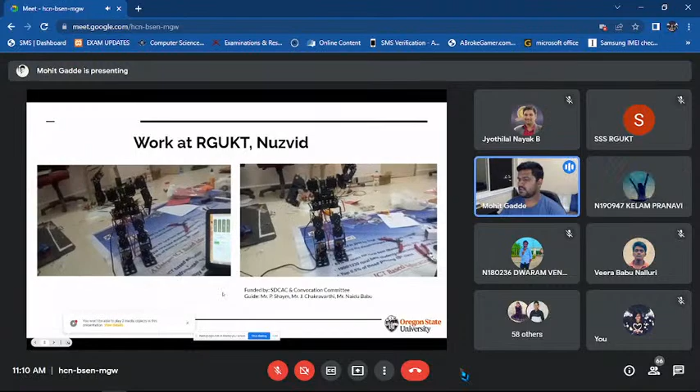I do not have the latest videos in which we were able to make the robot walk as well, and this was presented at RGUKT RK Valley in front of the chief minister back then.

After completing my third year, I joined Indian Institute of Science as a summer research intern. On the left, you can see a huge drone which would almost come till waist length, which I built during my internship there.

I am very proud to say that this drone was manufactured end to end, where I put in all my efforts. The whole structure and control systems were built by me. All I got was the batteries, motors, and the flight control board. Apart from that, everything was manufactured using carbon fiber.

Back when I was a mechanical engineer, I used to design robots and manufacture them using carbon fiber. This is one of the videos in which we showed testing of the same.

This particular drone has a thrust of 20 kgs, which is pretty huge. This was kind of unachievable back then, because we were intending to build this drone to carry organs. So it would be used as an end-to-end or last mile delivery system, where an organ for a transplant would be picked up from the airport and sent to the hospital, which would otherwise be tedious.

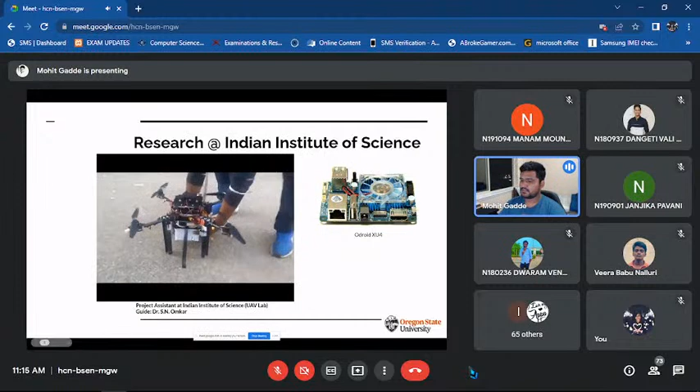We had a single board computer, the Odroid XU4, which uses a Samsung Exynos compute processor. The drone would take off manually controlled, then we shifted to guided mode, where the drone would try mimicking how humans walk on the road.

We are detecting the road and trying to stay in the center, which you can see with the mask. The drone autonomously traverses to a given GPS point and delivers the box. We were able to achieve this feat for about 1 kilometer, actually around 918 meters.

We could proudly say we got a drone autonomously flown from one end of the campus to the other end, autonomously delivering stuff. This was back in 2018. So this is how it traverses.

After working there for 6 months, I started working with Professor Debasish Ghose at his Guidance, Control and Decision Making Lab. This laboratory was initially working with guidance of missile systems and aircraft controls.

Later on, we planned on participating in the Mohammed Bin Zayed International Robotics Challenge, funded and organized by the current Crown Prince of Abu Dhabi. We had some interesting competitions, and this challenge involved using a team of drones to do various tasks.

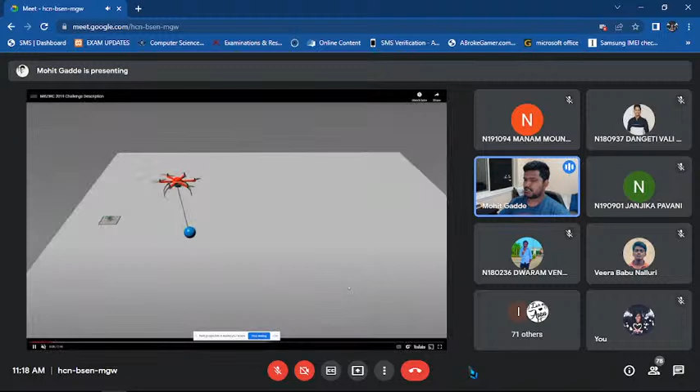We have what we call a rogue drone, which carries a ball and flies freely in open space. We have a team of 3 drones, though here they're showing just 1. These 3 drones go and detect where the rogue drone is, with no prior information, so we have to detect it using cameras.

Once we detect it, we grab the ball and neutralize it. This was the turning point, especially for me in terms of research, because we faced a lot of issues, and the problem statement wasn't constant throughout the competition.

In this video, we can see a blue ball being thrown into the box, which was the target then. Later on, the organizers started changing the rules, and we had to adapt to them accordingly. I'll walk you through this challenge.

The basic idea was to detect a drone carrying a rogue payload, grab it, and then neutralize the object. The other part was, if something is being planted, you had to eradicate it.

In our approach, we followed a similar architecture: we would search, try getting drones, do color segmentation thresholding, and create the region of search. I'll take you through it one by one.

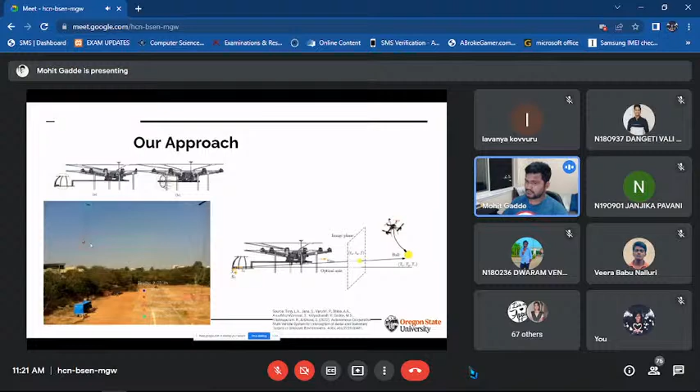When the filter was used to detect the ball or the target, whenever it wasn't detected as such, or we lost detection due to various conditions like lighting or wind gusts, or maybe software failure, this was one challenge in which we had to detect the ball and go through it.

And the second one was to pop balloons. Balloons were an artificial way of saying that the enemy has planted something in our territory and we have to neutralize it using drones. There were 6 to 7 balloons planted in the same arena, where one drone would fly carrying a ball, which we had to neutralize using one of our drones, and the other drone would neutralize the planted objects, which were the balloons in this case.

So we used a SAC-based controller. When we were testing these things, we found a lot of variation in the system parameters, and we had to adapt to a simple adaptive controller. Initially we were just going with a PID-based controller, and then we thought of using an adaptive controller since it was more robust to the gust or wind or whatever was being thrown towards the drone.

In our approach, what we did is we tried detecting the path of the drone. Here we used an RNN-based network, a recurrent neural network, to detect the drone and feed its point, and we used curve fitting methods to detect which path it was taking.

And then we had two of our drones which were aligned in a horizontal structure, where they would go and attack the target drone, and we grabbed the target. We were given 3 drones, of which 2 were put into neutralizing these targets, and 1 drone was used to neutralize all the balloons. It would take a grid search path and neutralize all the balloons.

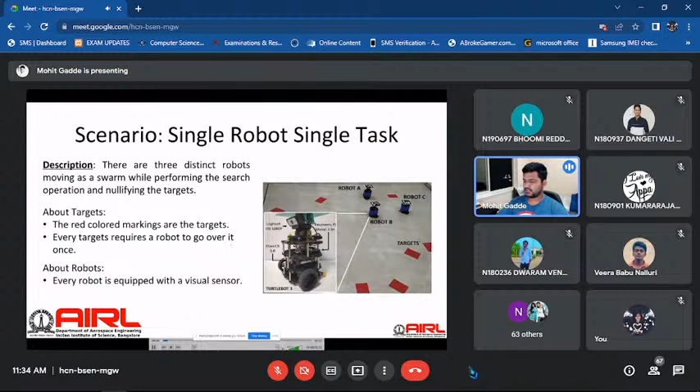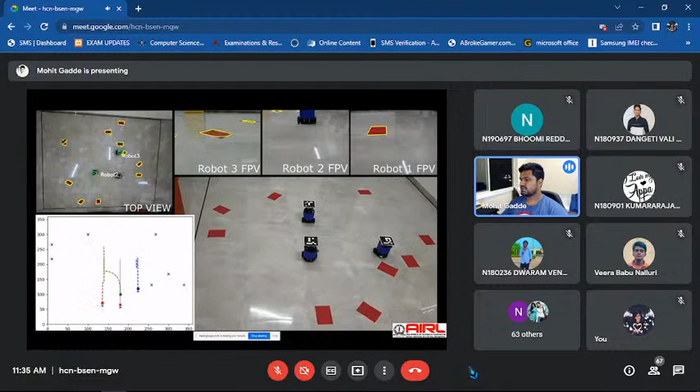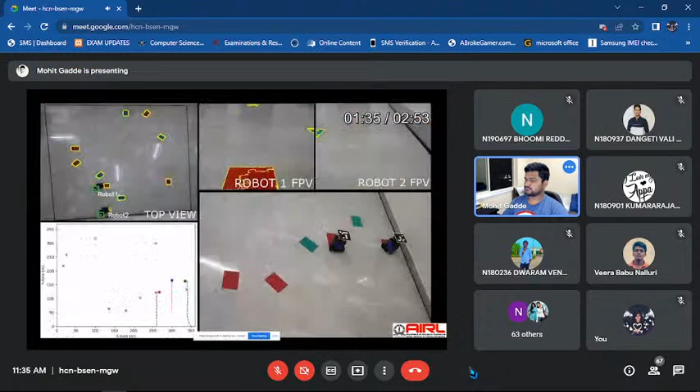So the platforms which we tested on were TurtleBots. Three robots would talk to each other using a regular Wi-Fi based network, and would update and track target neutralization. The red markers here are targets, and these robots would autonomously traverse through it in a team, trying to stay in formation without losing track. These robots would neutralize stuff. We can see markers here, used for our use case, where we would detect them as robot 1, 2, 3 to individually identify them. So yeah, this was basically on team robots.

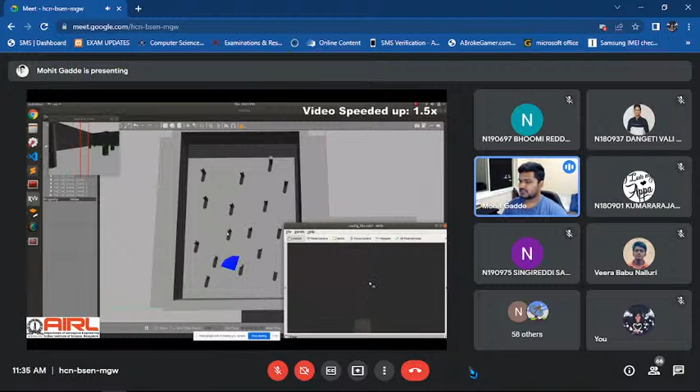Later on, before finishing work there, I worked on an algorithm used on small quadcopters, where they were able to fly at 5 meters per second, which is pretty fast for drones, using multi-sensor fusion techniques, and we demonstrated it in simulations. This project involved avoiding obstacles using just camera and LiDAR systems, and we were able to detect pretty much everything in clutter, controlling the drone and sending it to the given target.

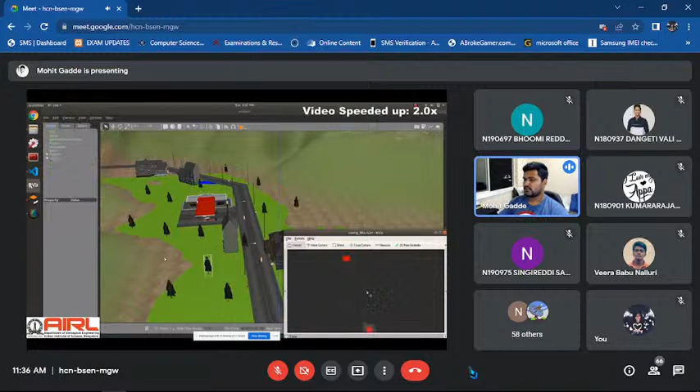This system was tested in an environment in a simulator called Gazebo, where we tried using realistic environments to solve the problem. We looked into realistic approaches using Microsoft AirSim, where this algorithm was tested on drones to see if it could traverse forests and similar terrain.

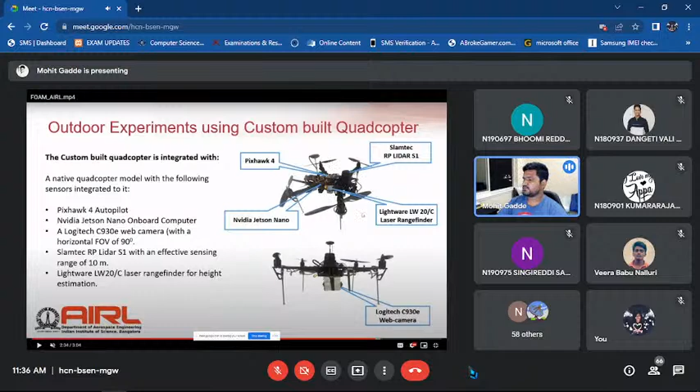So we tried testing it on hardware. We built a small drone and put a LiDAR on it—this is a small LiDAR system here—then we had a camera attached to it, basically to avoid this particular pool. This was done during the peak times when COVID hit us, and we couldn't really finish testing. We were just able to finish the basic testing of this particular system, and yeah, we got through the whole thing.

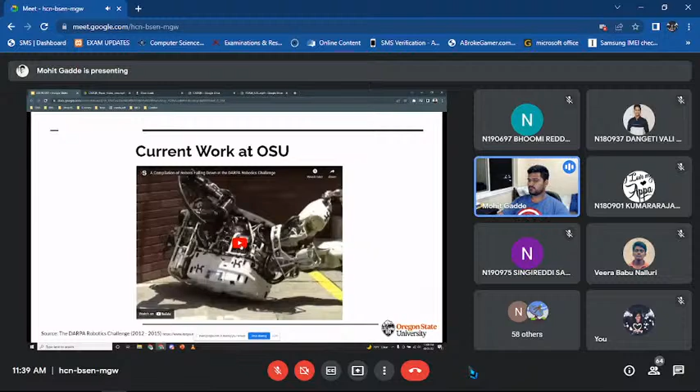I was pretty much done with mobile robots and aerial vehicles, because I wasn't feeling that enthusiastic or motivated towards solving any other problems. It wasn't that—it was just because these particular systems were more complex and could be evaluated against what humans usually do.

So these clips are from the 2012 to 2015 DARPA challenge. DARPA is a defense research agency for the United States of America, and they invited universities to build humanoid robots to do regular stuff which humans would do. This is what was the state of the art back then. There's been a lot of technological jumps since, but that was the era when humanoids actually grabbed people's attention, and researchers wanted to explore this field.

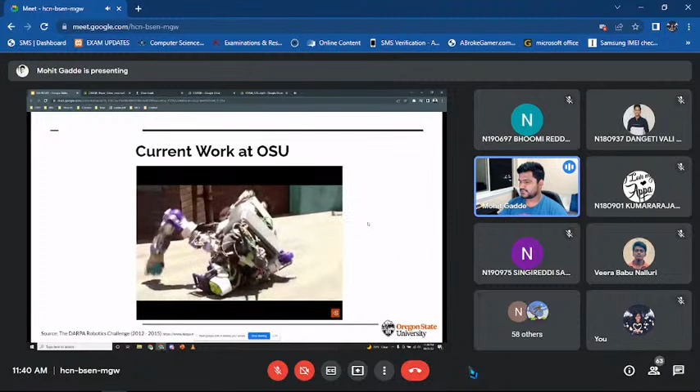So these systems use classical control methods like PID, model predictive controllers, sliding mode controllers, etc. Our lab doesn't work on these controllers, and we have our own framework which works on reinforcement learning.

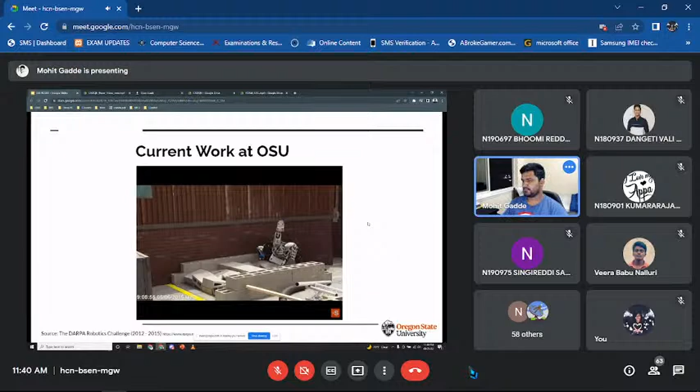Reinforcement learning is part of artificial intelligence, where we use reward-based functions to define states of the robot, and we penalize it based on what action it took. It's basically like training a child to do something—when a child does something wrong, you punish or scold it; when it does something good, you reward it. It's the same thing, but we use neural networks to do it.

Here at Dynamic Robotics Lab, we use our bipedal robot, Cassie. This is the Cassie robot, developed in-house at Oregon State University, I guess some 4 to 5 years ago, and development is ongoing.

These two projects were done before I joined the lab, and then we started working on reinforcement learning, and we have a couple of world records now.

So this is what we did, and there are other actions which we showed with the robot. A robot with the same neural network policy can do different types of gait motions like hopping, trotting, galloping, running, etc. It's the same network used to do that.

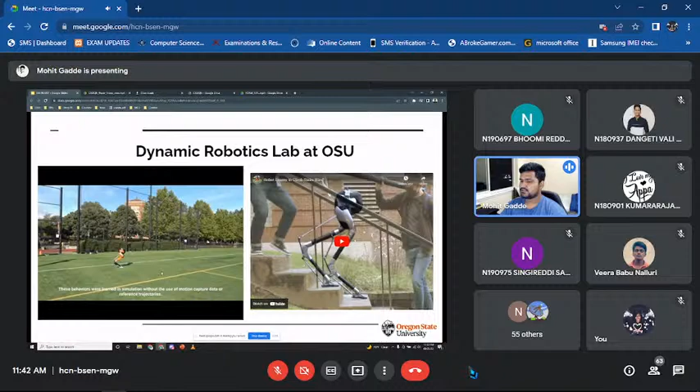The only thing we change is the phase input, and you can see different behaviors of the robot when it's in motion. Usually neural networks are not well suited to these changes, but we got them working.

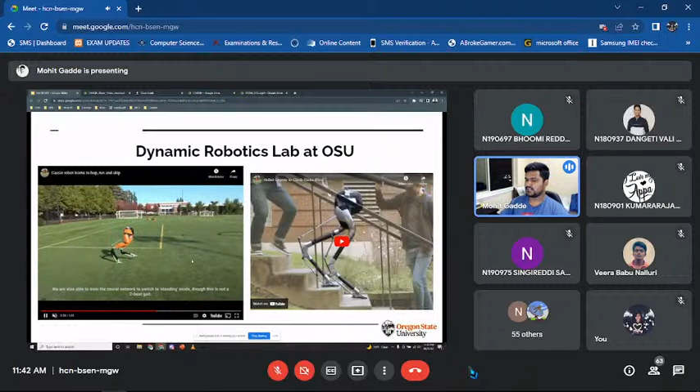This is one of the achievements done by the lab. Our recent work is traversing staircases blind—the robot has no perceptive interface at all. It doesn't have a camera, it doesn't have a LiDAR. It tries walking on the steps.

We used reinforcement learning techniques to help it understand how it went. We use a simulator called MuJoCo, where we have steps designed, and we train the robot to understand it. It's not only trained for a certain height of steps—the policy is trained using something called dynamics randomization, where the system features, environment, everything is randomized.

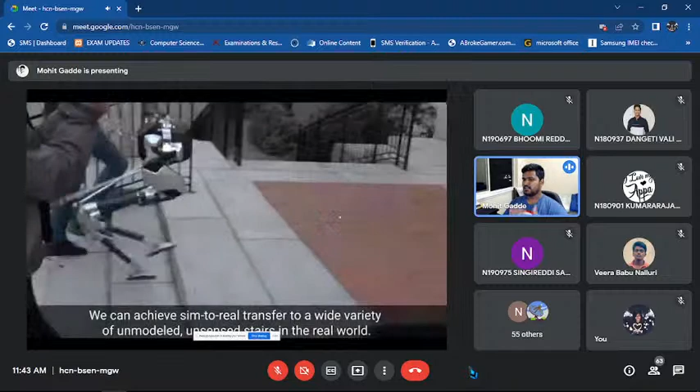You can see the robot is able to learn how to walk after a few hours of training in the simulator, and it uses the same gait motion to come down, go up, and climb, and even if it misses a step, it's able to try recovering. This is where we went towards research.

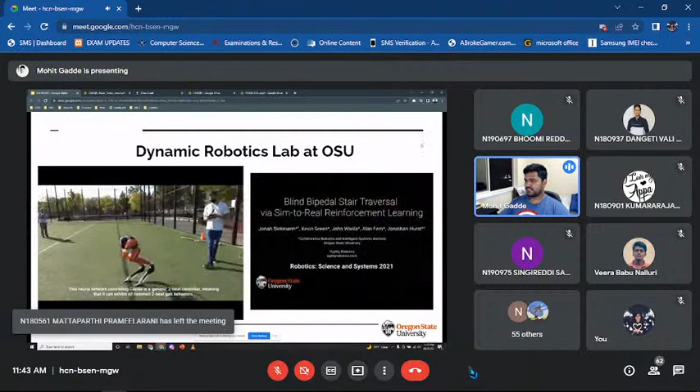Now I'd like to talk about my own research. My research focuses on making the robot walk in footstep-constrained environments, where we use reinforcement learning, which enables gait motions for the robots.

You have seen the same. So you see this robot is able to do different things with a similar policy. There aren't many changes, but it is able to do the stuff with that.

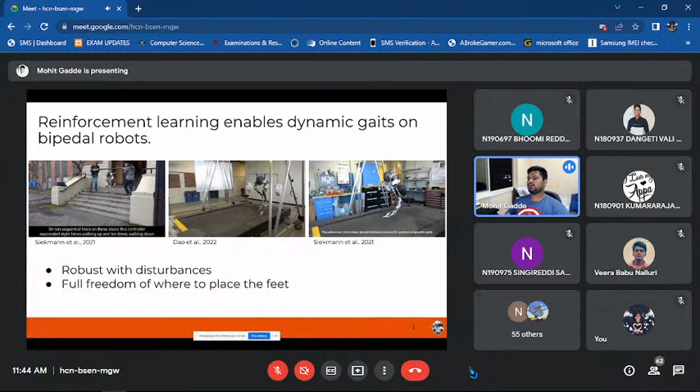The research where I come into is we wanted to have targeted footsteps. In all the other previous videos, you would have seen the robot just going into any environment and trying to walk around. But we were interested in finding steps where you had constraints for bipedal robots. For example, steps were solved, but what if you had to traverse among places like this? You had to have stepping stone sort of policies.

So this is where we started training an RL-based policy loop, where we had the footstep constraints, and we would give the required footstep length, where the robot would precisely put its foot on the marker, as you can see in the simulator. This was done in real time, where we put a camera and we asked the robot that this is the region of interest where you should be walking on, and the robot started doing that.

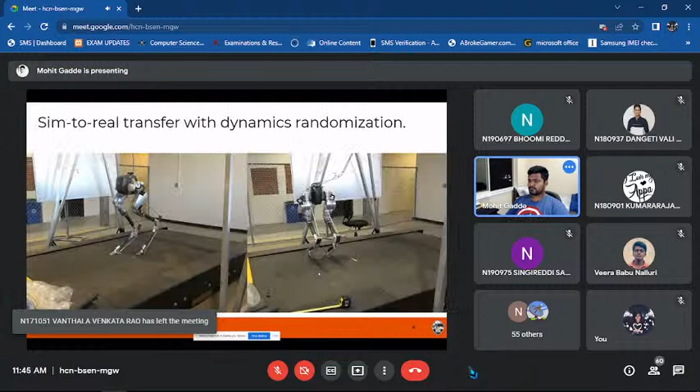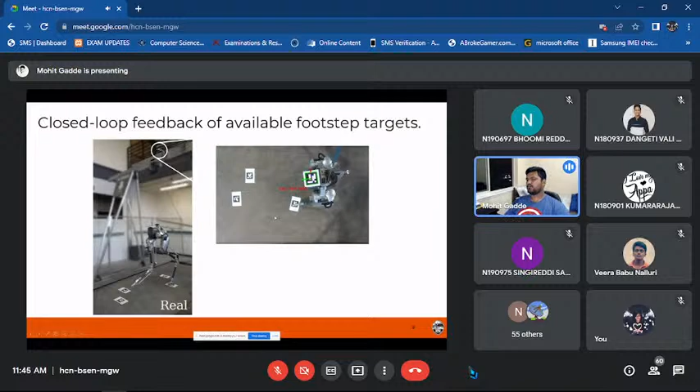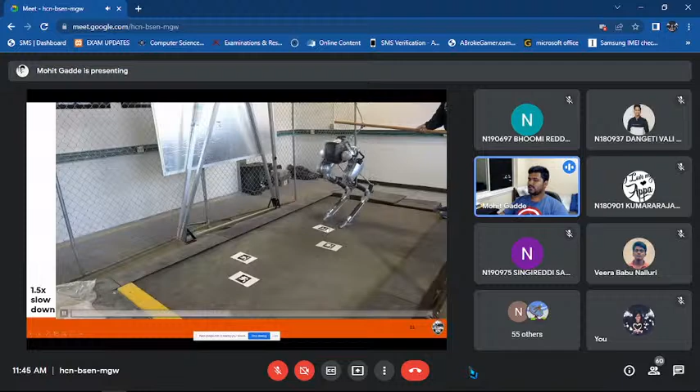We had markers on the floor. We had a camera which would tell the distance between these two markers to the robot to put its footstep on it. So this is me looking into the stuff. Here we command the robot to have its footstep here, and we are pretty much accurate about it. We had an error of about 5 to 8 centimeters, which is pretty decent for these sort of constrained systems.

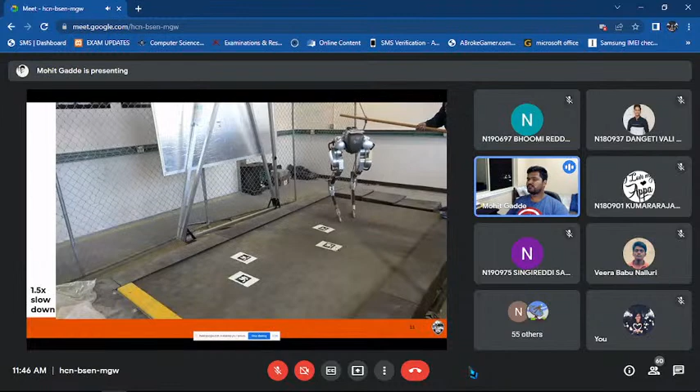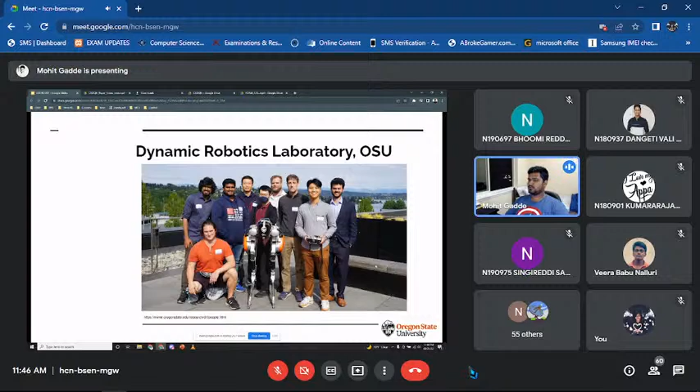So yep, this is the end of my presentation. This is the lab, these are my colleagues and lab members. I work with Dr. Alan Fern, and that's our robot Cassie. Thank you, I am open for questions now.